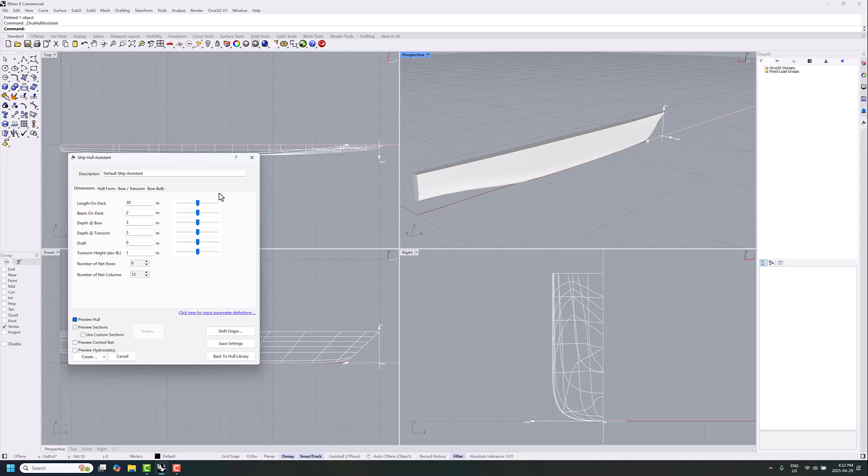So if we jump over to Rhino here, I have the Orca3D menu, and we'll go to Hull Assistant, and we'll go straight over to the default ship assistant here, open assistant, preview the hull. So I've got this set up here with a 30-meter length, and for multi-hull, we're just going to look at a basic catamaran. So what you do here is you're modeling one of the demi-hulls or the amas, and then you want to set it as a little bit of an offset and generate the mesh.

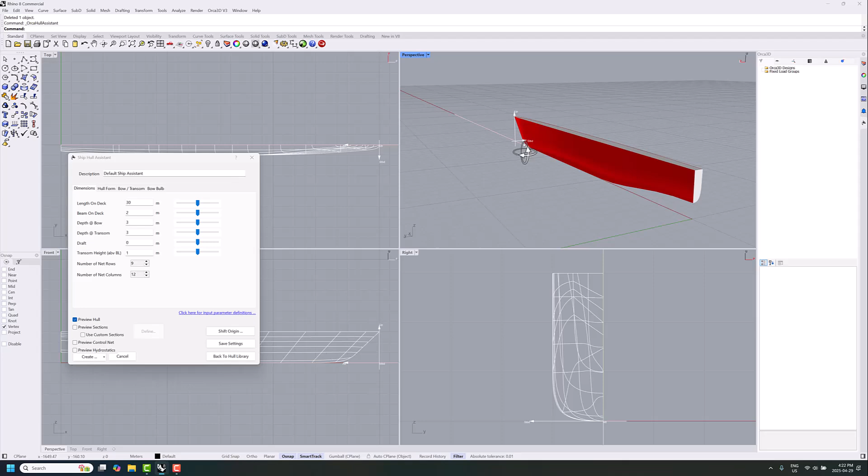Now the hull gets mirrored when you import it into the ProteusDS ShipMo3D toolset, so we're just doing one of the amas. Of course, this is arbitrary, it's not a real catamaran, but for something that's 30 meters long, we'll probably have a pretty slender shape here, so I was thinking 2 or 3 meters. 2 meters is going to turn into 4 meter deck size when we make a complete system here, right?

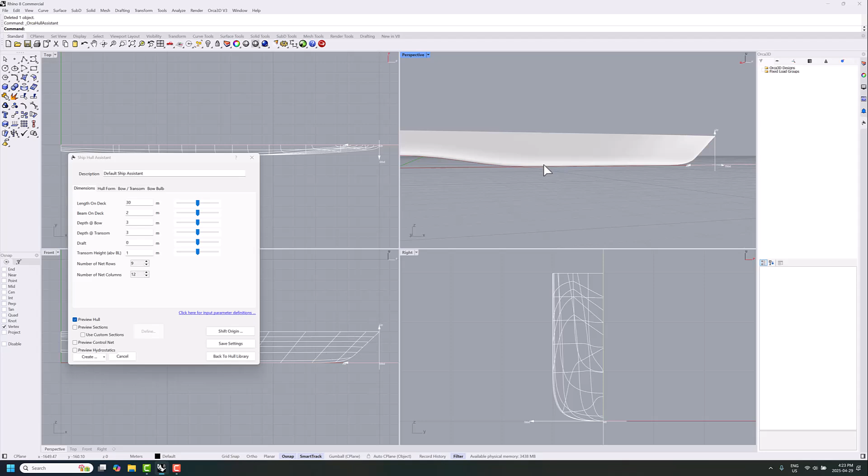So what we'll do here is now I've got the draft set to 0. We want that set to 0 because we're going to adjust the draft when we do the hydrodynamics calculations later on. So normally we would just do the port side only for a monohull. Actually here we want to do something different. We want to do the full model.

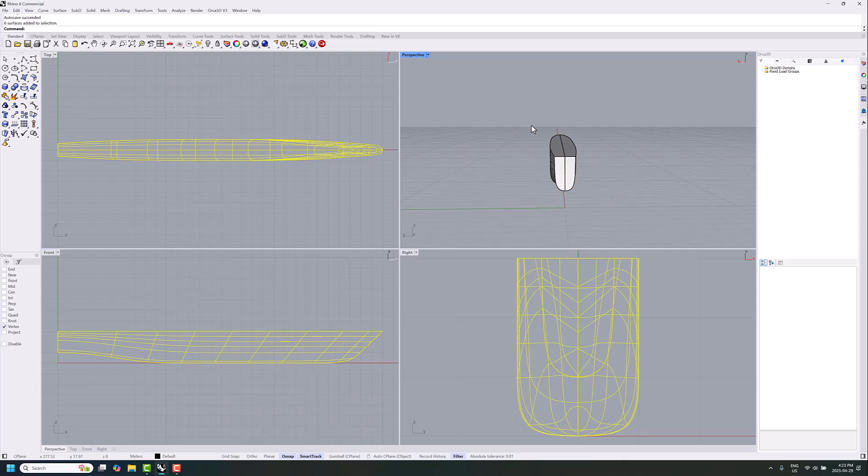And the reason for this is, again, we're going to add an offset now. So the first thing here, we'll just move the whole thing over. So we'll type the move command in, and you can pick any relative point, but honestly, if you just get an idea of what your offset's going to be, we'll just start with 0, 0, 0. So that's going to move a point relative to that origin there. So rather than clicking here, I'm just going to type in the value.

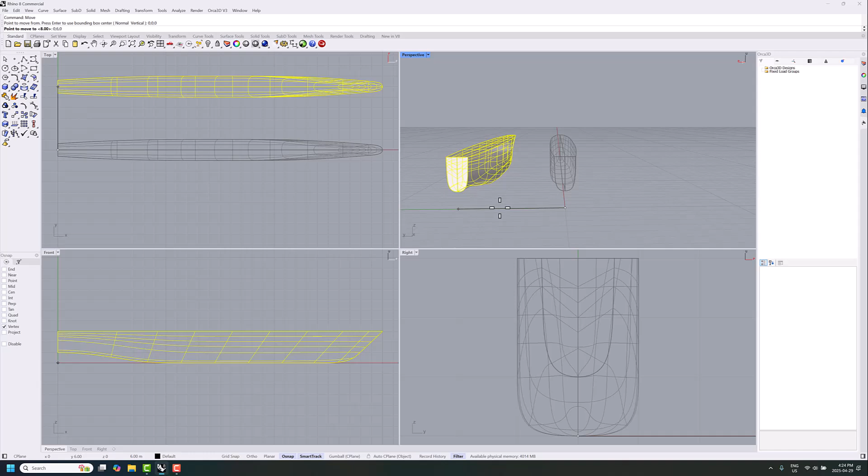So this is going to be the separation from the midline of the ama. Maybe we'll just pick something like 6 meters, and we don't want any X offset. So 0, 6, 0, and then of course that's a mirror image about the midline, so the total ama separation distance is going to be 12. Okay, so here we go.

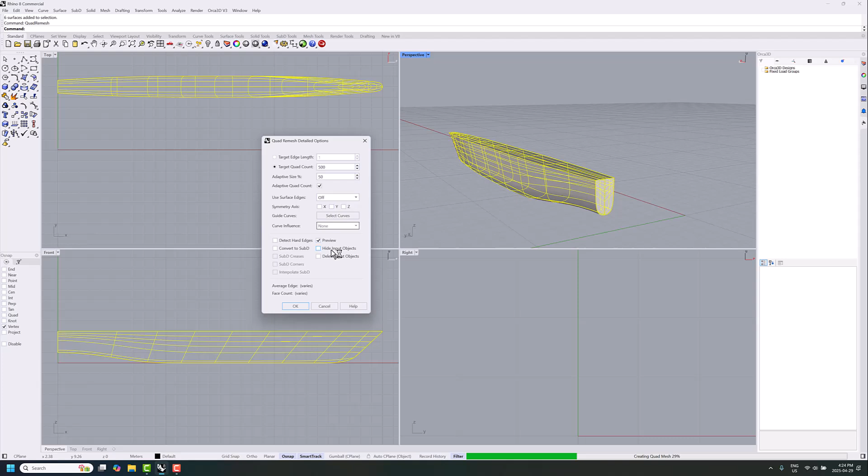Now this is not the numerical mesh, so we still have to do that with QuadRemesh. We'll just select all of these, Control A to select all, or you can bandbox select, and then type QuadRemesh. And I like to preview, hide input objects. So I've got 500 elements here, and you might want to play around with some of these settings to see if you can get a little bit better results. This looks pretty nice, not too coarse a mesh.

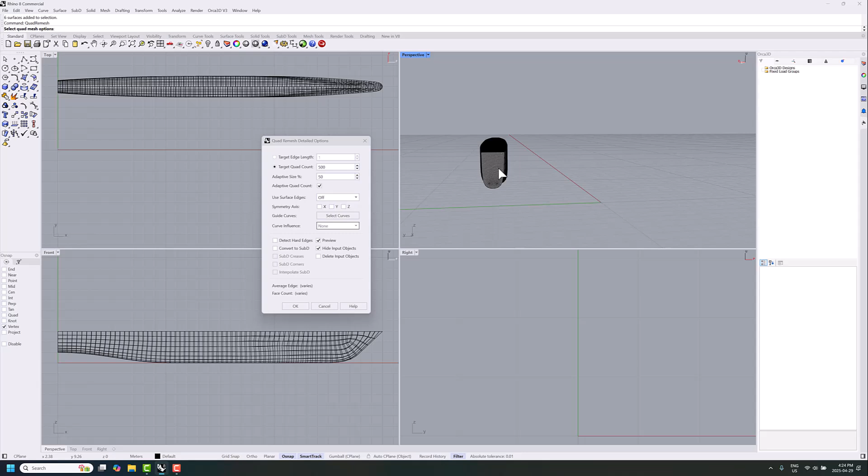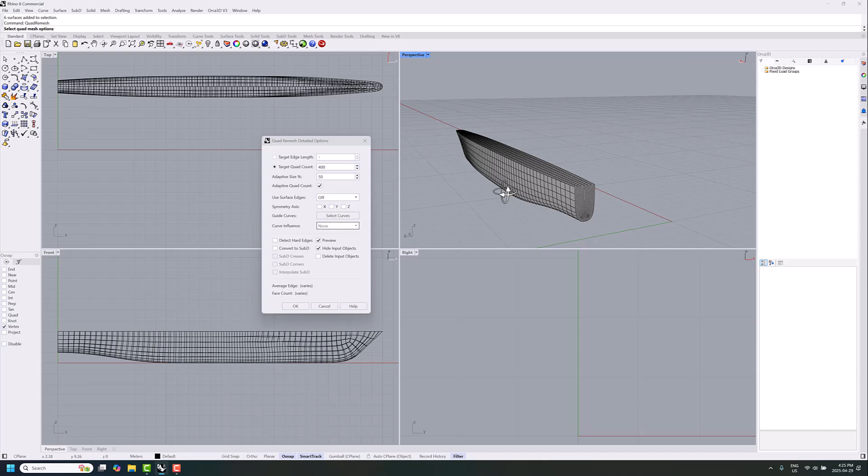I thought the transom's a little bit high resolution for my liking, but I didn't want to spend forever playing with this right now. I wanted to demonstrate the general idea of how you'd go about doing this. So if you reduce the number of elements here, say for example we knock it down to 400, you'll see it remesh everything, and everything's a little bit more coarse, although there's still quite a lot of elements on the transom. Not a big deal, you probably could optimize it a bit manually. Anyway, this looks fine. So we'll go OK.

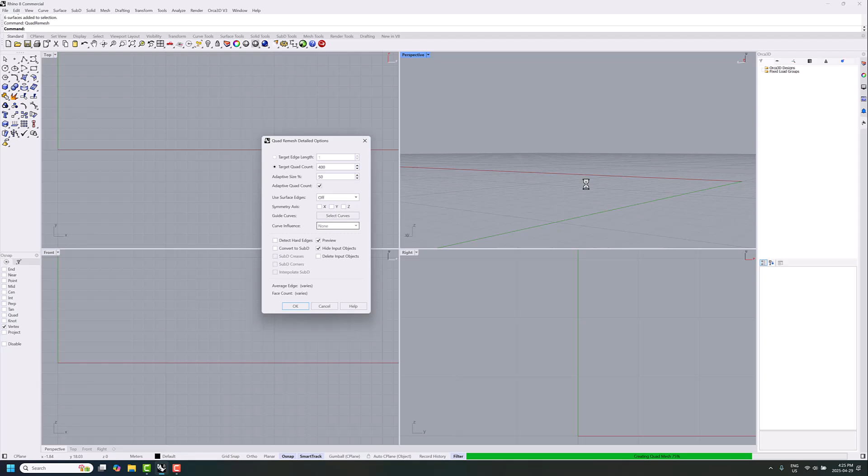And oh, I thought I selected delete input objects. Let's do that again. So I hit Control Z to undo. We'll do QuadRemesh again. It's just a little bit annoying to delete the input objects. So preview, hide input objects. Just take a look at that again. The reason you want to do that is you want to make sure the only thing that's getting put into the output file is the OBJ numerical mesh values, not anything on the NURBS parameters.

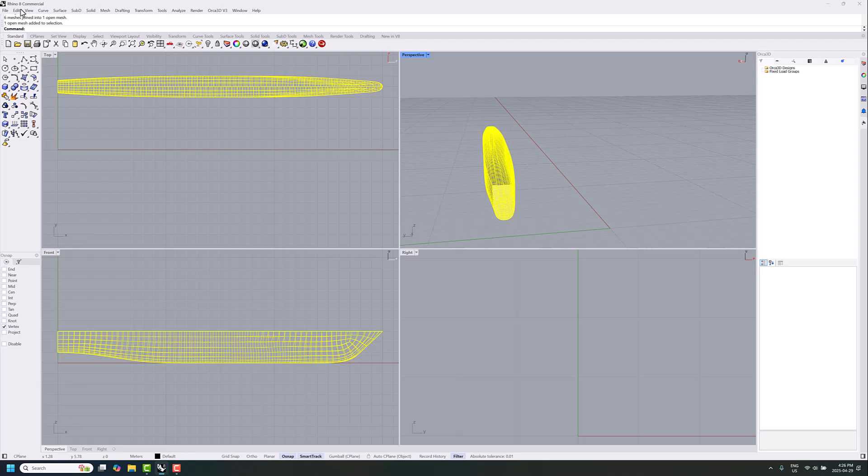So just go delete input objects, go OK, and you see what we have left is the mesh of the single hull. So we'll join that, so it's one entity, and now we'll do save as. On my desktop, I'm going to make a new folder here, multi-hull, and save this as my hull input file.

Okay, so now let's open the ProteusDS ShipMo3D toolset and make a brand new project. Change that working folder right away. There's my desktop, there's my multi-hull location. Change this to 30. Draft at midships, 1.5 meters. We'll go add new data, panel hull. And we'll pick wavefront OBJ. There's my hull file that I just made.

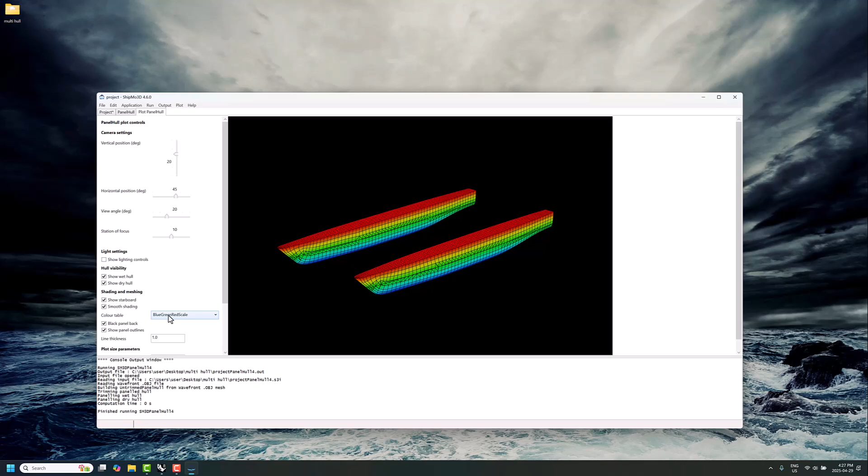So we'll run this. And then when we plot the panel hull, we should see our mirrored ama there. So there's the whole catamaran multi-hull. Obviously, if you want to adjust the separation or any of the details of the hull itself, you go back to Orca3D and Rhino and make those adjustments accordingly. But this is how you can get that starting point with a multi-hull hydrodynamic analysis and seakeeping analysis.